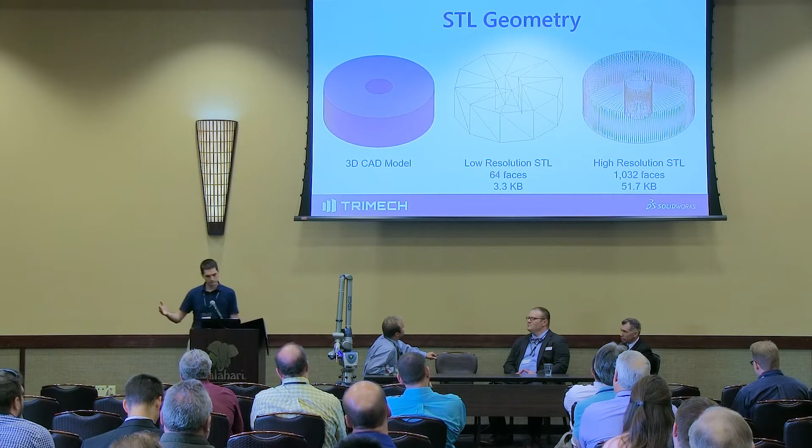If we look at some of the file properties, you have about 64 faces that make up that geometry, and it's about 3.3 kilobytes of data. Now at high resolution, you're increasing the number of facets, approximating all those curves with tiny facets, so to the naked eye you can't even tell they're there. But look at the effect on the number of faces—over 1,000 faces, over 50 kilobytes of data. For a small part like this, that's not a big deal. Where you want to be operating is over on the right-hand side of the page, so you cannot tell that your part's geometry is any different from your CAD model.

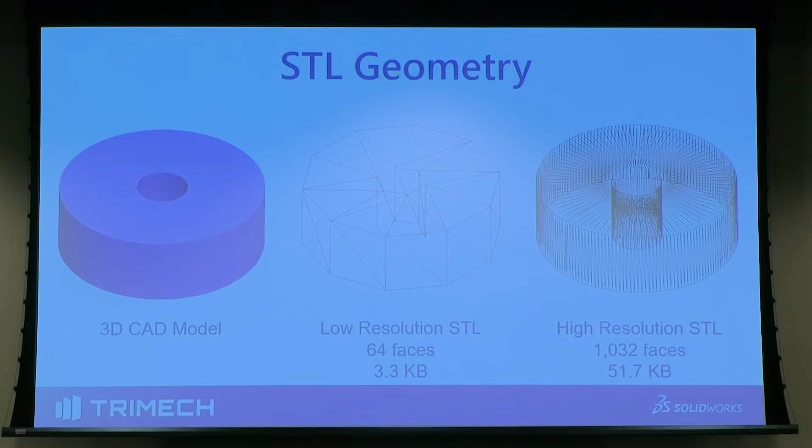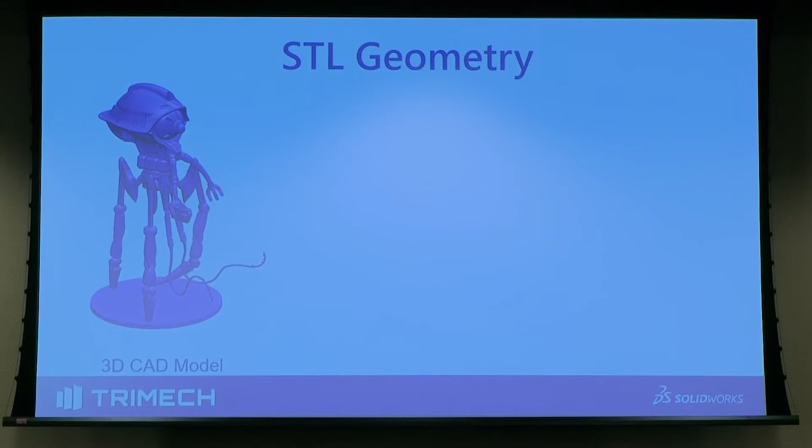Okay, what if we go to something very, very complicated? This is a model of a Martian tripod that we did. It's about 6 inches tall, made up of 18 different pieces, all laid out onto sprue frames and injection molded. It's a model kit you could buy for a game, like a fantasy game.

So if you look at very low resolution STL files, you're looking at about 180,000 faces here to make up those 18 parts, about 9 megabytes. Even at 9 megabytes, you're on that verge of, can I email this file to somebody if I needed to? That's something you have to consider. But that's at the very lowest resolutions.

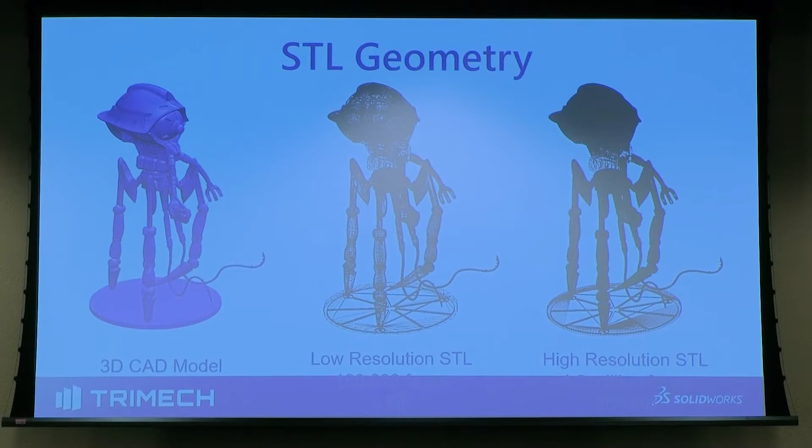Now we go to a higher resolution. Now you're at 4.2 million faces and 208 megabytes. There's no way you're emailing that. But you have to remember this is 18 different files. Again, you want to be operating over there on the right-hand side of the screen.

So let's go through some things that you need to do in order to save an STL file. First thing is you have some geometry, some CAD geometry.

We work a lot with plastics, so that's what I'm going to focus on here, and that's what we're 3D printing with. So if you have any hardware shown, be it threaded inserts, pins, bearings, whatever it might be, if those are shown in your part, before you save an STL, you want to hide those, because you only want to print the plastic part, not the metal part. You're going to install that later.

Same thing goes for construction surfaces. So if you're using surfaces to help with your CAD layout, whether you took that surface from a 3D scan or as construction geometry earlier on in your part, you want to make sure you hide those too.

Depending on the 3D printer and the software you're using to process these STL files, it might actually try to print that surface if it is showing. Now you don't need to delete these bodies, you just need to hide them so they're not visible. You can keep them there in your file, just hide them. All the CAD software will give you that option. You could show them again after you save the STL file.

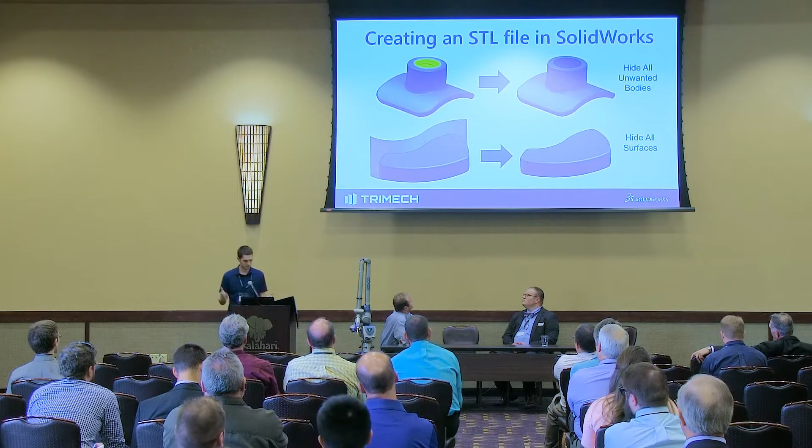And then from there, it's as simple as File, Save As STL. It's very, very simple to save an STL file. But the first time you save one, you need to set some parameters.

Can everyone still hear me okay?

Yeah, okay. So you go to File, Save As. The first thing you need to do is select the file type. Just like saving any other file format, you pick STL from the options.

The difference between binary and ASCII isn't really important here — just understand the binary file size is much smaller. It's kind of a standard to use.

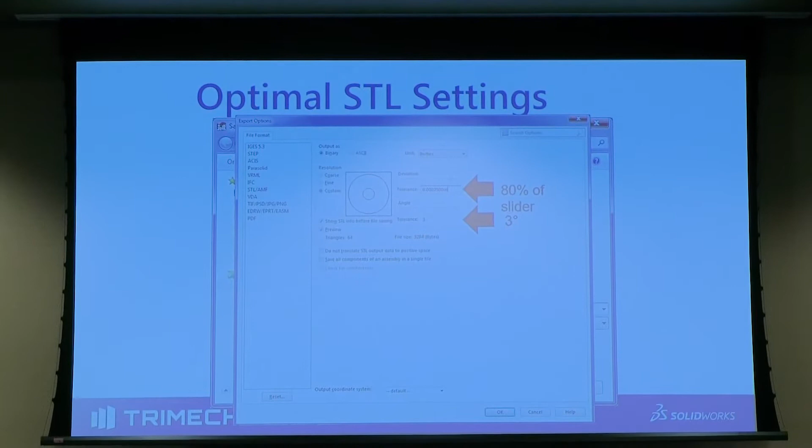And then you're going to set these two metrics. The first one is deviation, the second is angle. To my knowledge, the deviation is actually part-geometry dependent, so depending on how big your part is, that deviation will be different. What we do at Creative Mechanisms is set that at about 80% of that slider, and then we set the angle at 3 degrees.

A few years ago, each of the 3D printing machines would tell you where to set these. Now they just tell you to click Fine. If you look to the left of that circle, you have a few different resolution options: coarse, fine, and custom. Right now we're on custom because we're setting them ourselves. They say you can just use fine — if you click fine, those sliders will move over to the left and you'll have a lower resolution. We find using these custom settings to be the best.

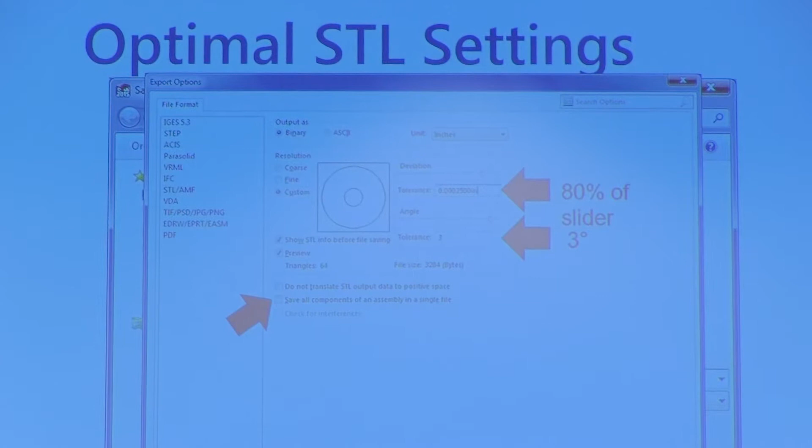The other thing you want to make sure you don't click is 'save all components of an assembly in a single file.' If we go back to that tripod I showed, that was 18 different parts in an assembly file. If I saved that as an STL, it would put all those bodies together as one STL. I want them as separate bodies so I can print, orient, and arrange them all on their own for reasons like optimal build direction and minimizing support material. You're also more closely mimicking an injection molded part, since you have all these different parts that need to be assembled, and you understand how they assemble.

And then you just click OK. Pretty simple — you only have to do that once. So you do that the first time you save an STL file, and that's it.

Another good tip is if you click Fine, write down the numbers, and then if you want to do custom... Yes, you can. I'm pretty sure those numbers will actually change depending on your part. As I was making this presentation, if I had the tripod up, those numbers would be different. The angle doesn't change, but that other number — what was that number? Sorry.

But that tolerance number does change. So like I said, what we found is 80%, 3 degrees seems to be the best. All right, let's go through this first walkthrough.

Again, we have this tripod model. It's 18 different parts, so we bring up the pointer here.

Okay, so we just go File, Save As. We select the STL file type.

In this case, I have 18 different parts, and I want to save them as separate STL files. So I'm just going to delete the file name and put a little hyphen there. Otherwise, that's going to be a prefix on every single file it saves. So I just put a little hyphen prefix.

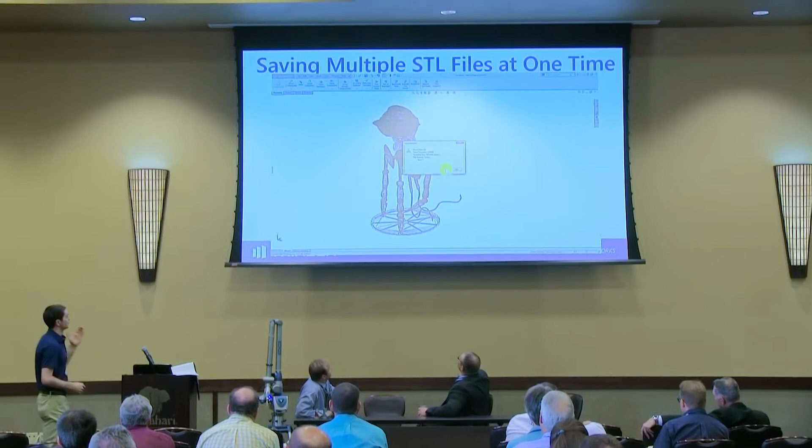It goes, it saves all 18 parts. I verify that it saved them. And then if we bring up Windows Explorer here, you see those files are populating, and now I have every single STL file saved.

Alternatively, I could go in and click on each one of those 18 different parts, open it, File Save As STL, and do this process 18 times. That's a big time waste. Just do it one time from here.

And now from there, we would take it into the 3D printing software. In the case of Stratasys, that's Insight and Control Center. So that'll be our next walkthrough. Anybody want to see that video again? No? Okay.

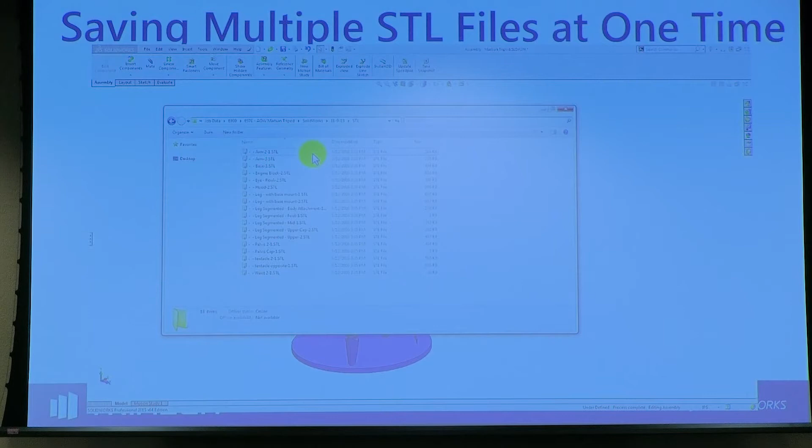Okay, so now here's a walkthrough completely from 3D CAD all the way up to 3D printing the part. So we'll run through that.

So again, you always start off with File, Save As STL. Choose where you want to save it. Confirm the save.

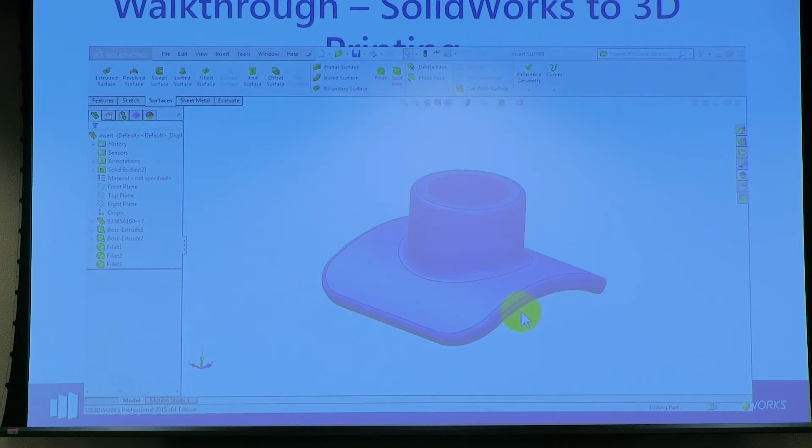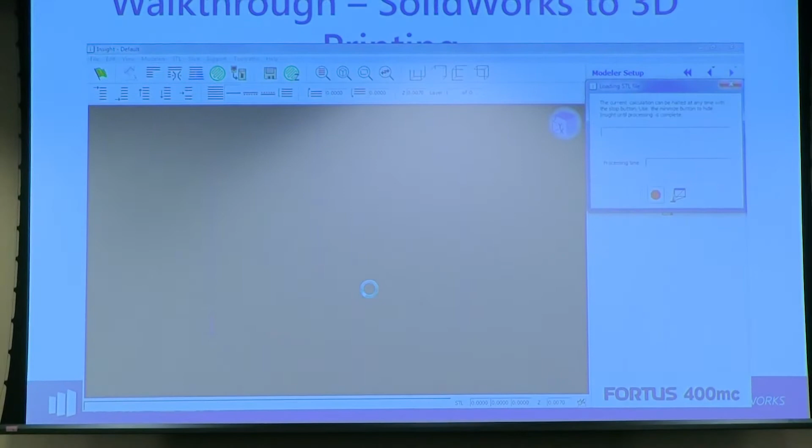Then you bring up the Insight software, this is from Stratasys. You're going to open that STL file, and the first thing you want to do is orient it in the preferred growing position. So we don't want to grow it like that. We're going to put it down on its side.

And then we click the Slice button, it slices it into different layers. We click the Support button, and it adds the supports beneath that.

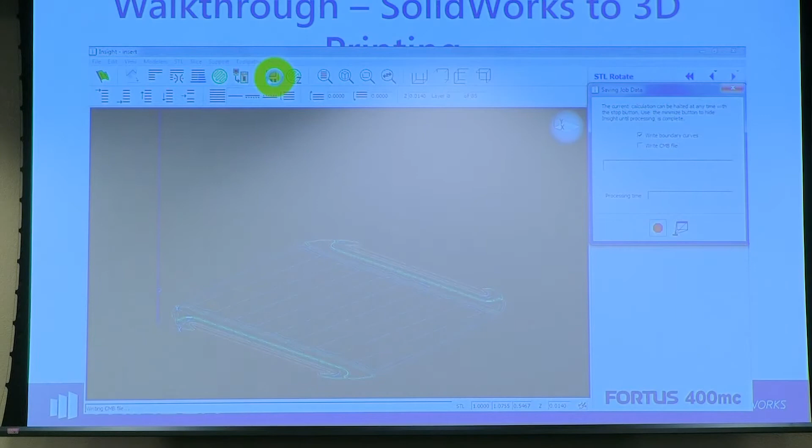And then you click the Toolpath button, it automatically generates the toolpaths. In this case, there's no reason to modify any of those toolpaths. It's a simple part, so we go to Save.

And then we go to the Control Center and insert that file. It's called a CMB file. There's our little part laying on our build platen.

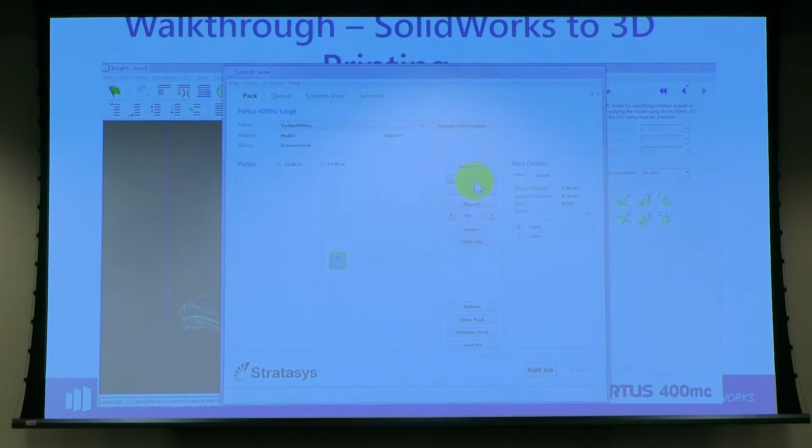We can add copies, you could fill up that whole platen, you could put other parts on there. If this were the case of that tripod, you'd have 18 different parts on here, and they would all fit. The nice thing about this is it tells you how much material you're going to use, how much support material you would use, and how long it's going to take to build.

And actually, once you click that Build Job button, all those numbers will fall to be a little bit lower. Anybody need to see that again? No? Okay.

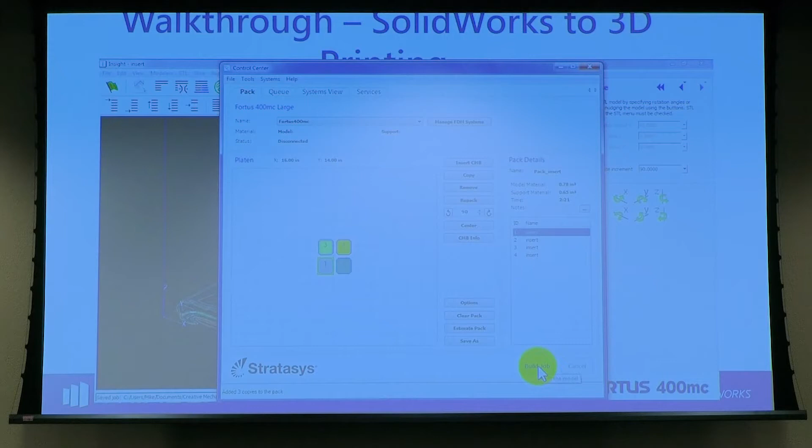So that's pretty much it for creating STL files and the background of STL files. There's all of my information.

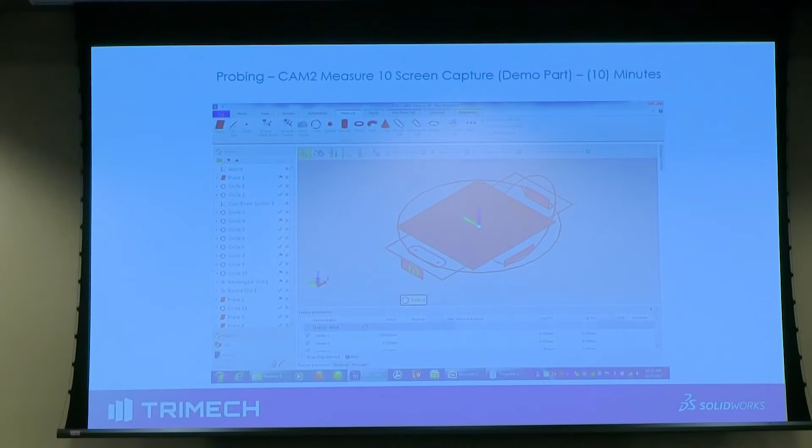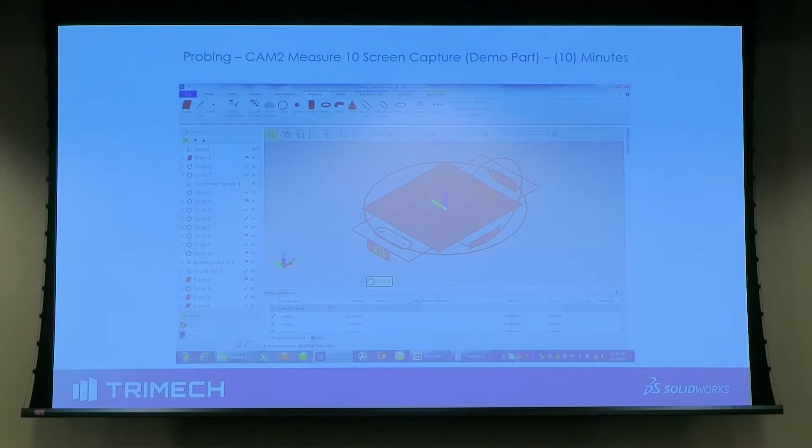We do a number of things we can talk about later, but here's the basics: these flat components might be all I need to capture a part that's mostly prismatic or machined, and then export that through to SolidWorks, for example, to create and model that 3D model. And then it can either be broken down, just like Michael said, to an STL that can be printed, or it can be put on a CNC machine, right?

So there's a number of things that can be done with that. This capturing of the geometry, essentially what you get is, if you looked at it... hang on, I think I'm losing my video feed here. The cord's kind of on a lift. You'd be touching off on these features and you'd have something that essentially looked like that on your screen.

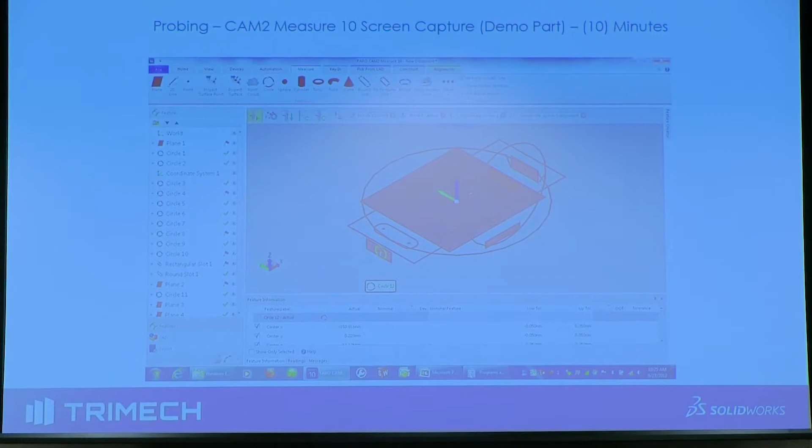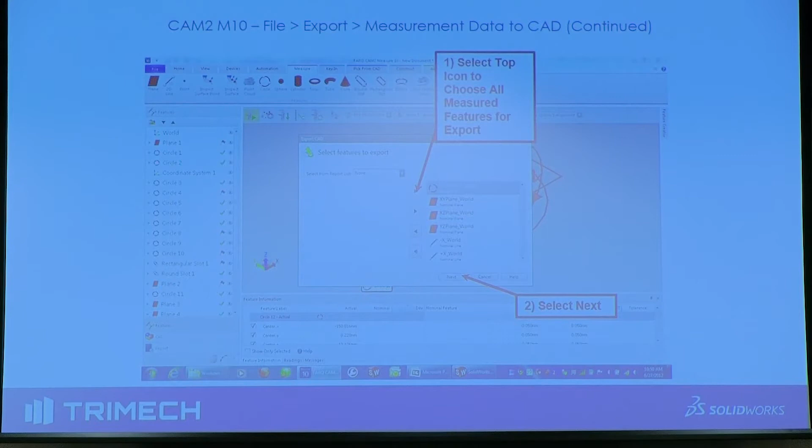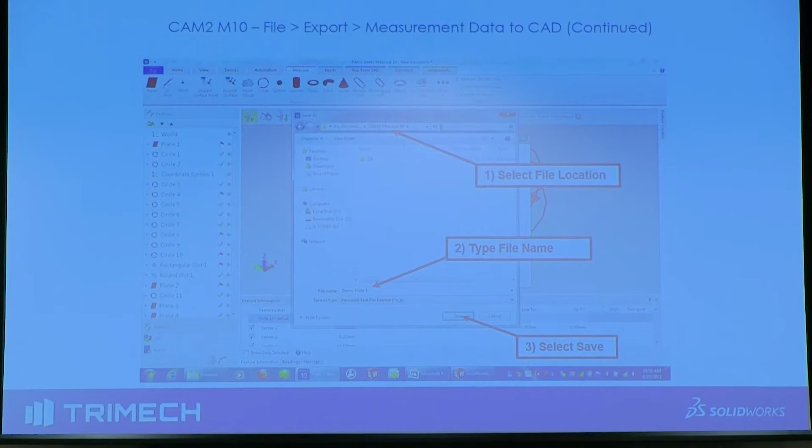So that's kind of where we come in first, is breaking down the geometry, and then we export the geometry out of whatever inspection or capture software we have, or right inside SolidWorks using one of the plug-in softwares. So you're sketching using the ARM, for example, and export it as a Parasolid file or as an IGES file, and pull that into, in this case, a Parasolid file, open in SolidWorks, choose a Parasolid format, a couple of settings, and this is what you've got.

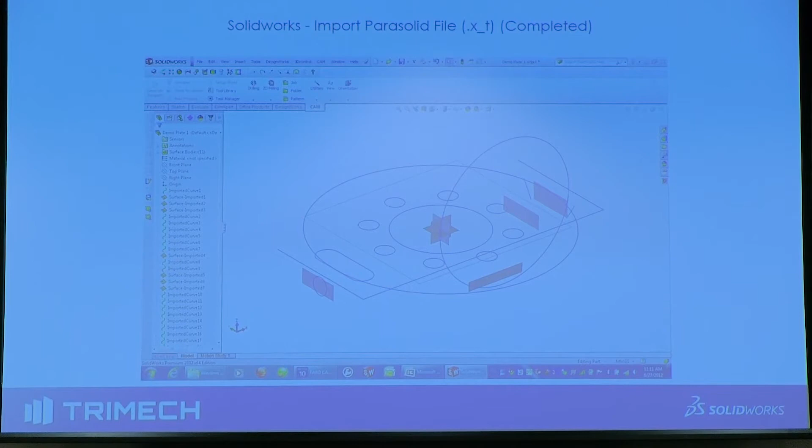That's enough for a designer to knit together surfaces and punch through holes, and that might be all that someone needs. Very simple, it's not very expensive. The ARMs have been around for 35 years. Gantry CMMs have been hand tools, and keying in that information has been around for a while.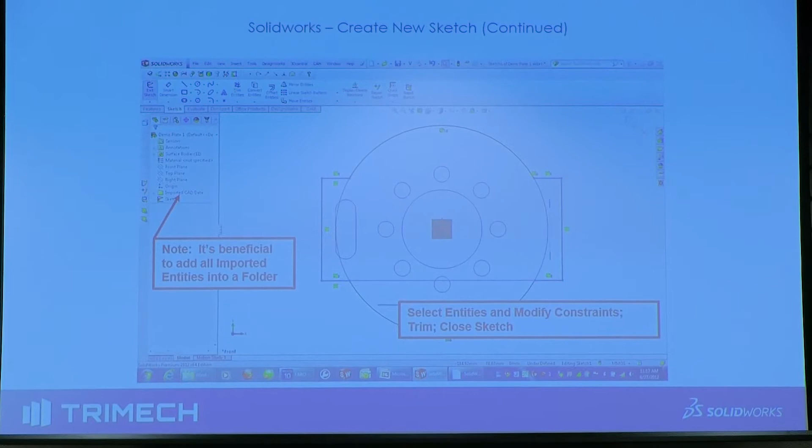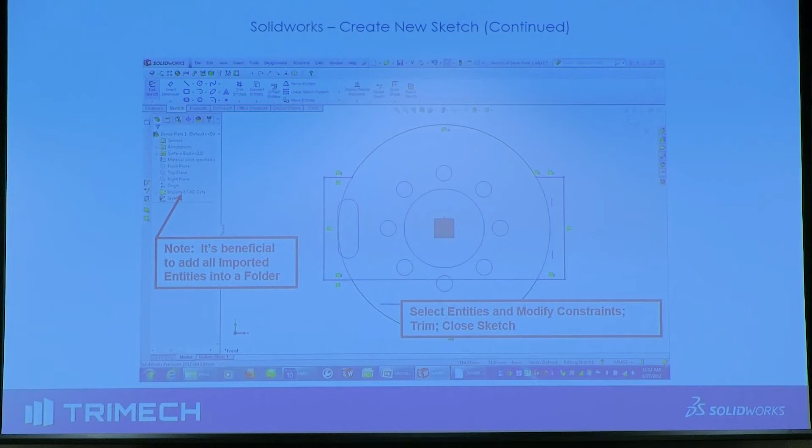But to a certain degree, we can take and look at something in reality and pull it into the digital world faster than keying those things in, faster than just clicking them and saying, hey, I need a thickness to be an inch. This actually pulls it in as built. So there's your clear geometry back for a second, and your coordinate system in the middle of the part. And you extrude it and you have a solid model, okay?

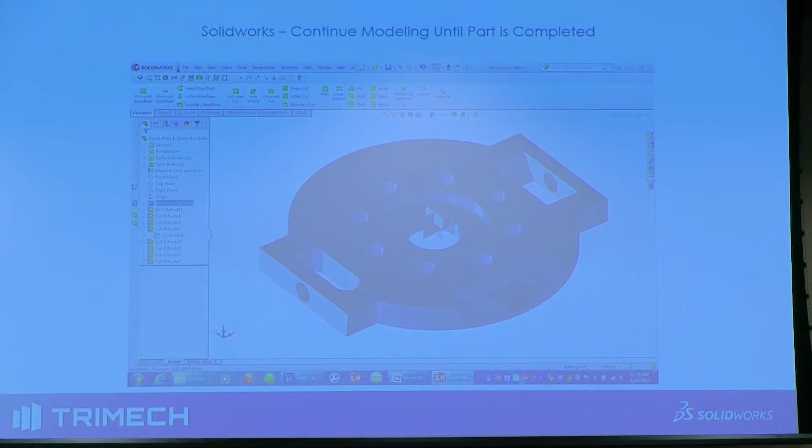So this may be, if some of you are thinking, hey, we got to get into 3D scan and we got to make 3D parts, turning them into STLs, we can skip this third-party point cloud idea completely if your parts can be broken down to a more simple level. So that's one interesting thing, is that you go directly into the SolidWorks software or Inventor software, and then export that either as an STL or as an IGES file or as a format that your 3D printing software or CNC software can cut.

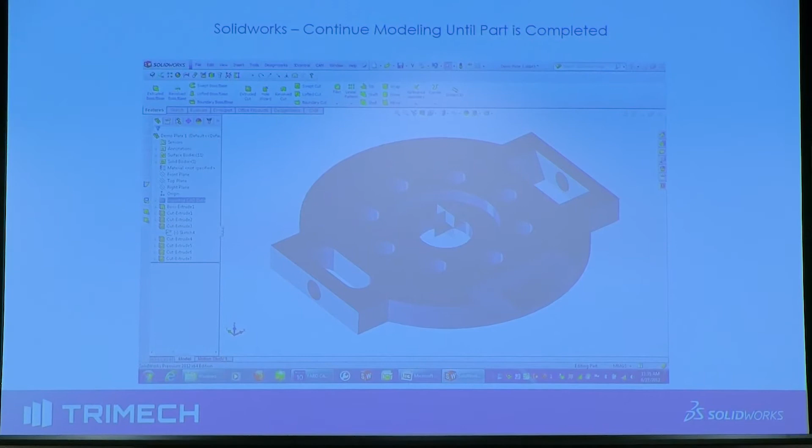Where it gets really interesting is when that geometry gets more complicated. So what's a portable CMM? It's a relatively old piece of technology that's got a lot of development in it. It tracks where that probe is, and it also tracks where the laser scanner on the end of it is in space. What's 3D scanning and how does it work?

We'll get there. And then the Faro arm, which we can talk about offline, but it's one of many devices out there on the market that can capture data as far as laser scanning is concerned, and it's one of few that can capture both that hard data at a tight level of precision and the scanner data as well.

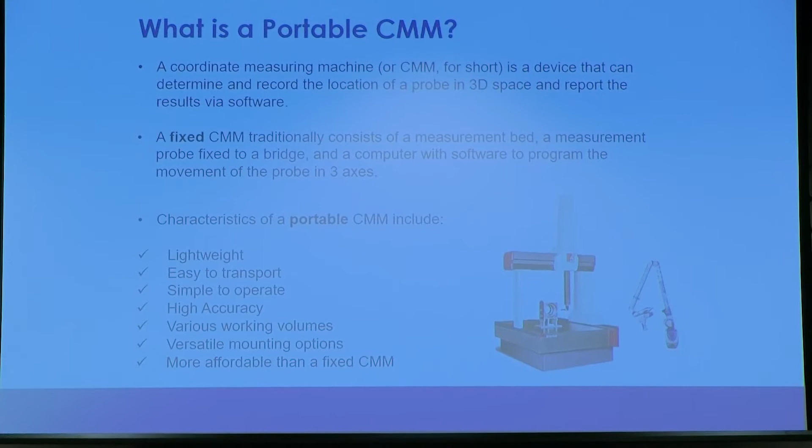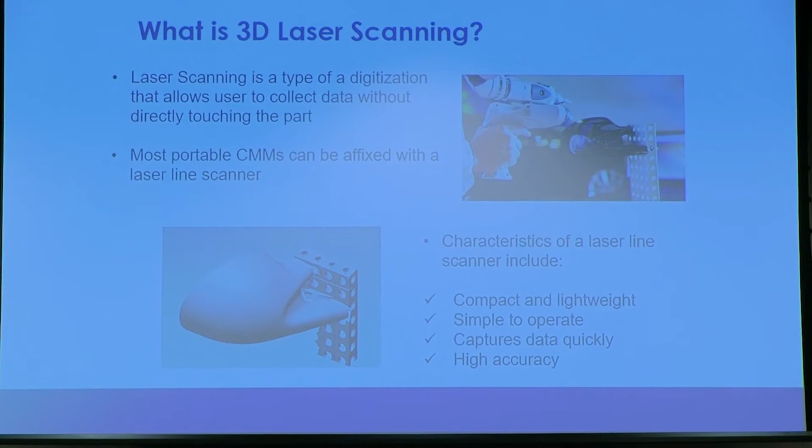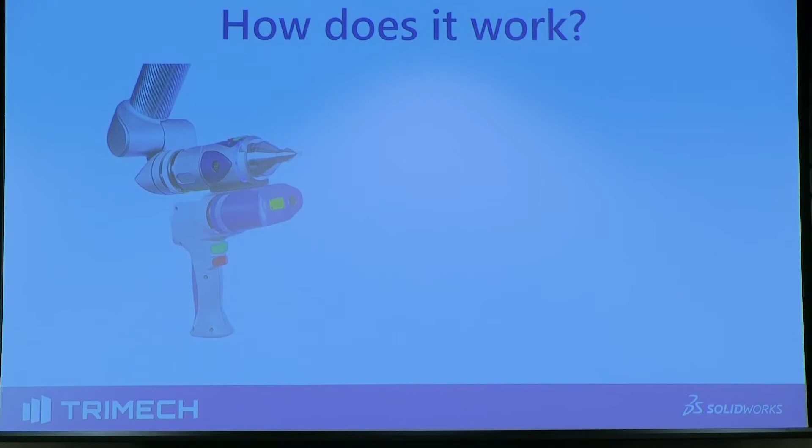Faro sent me this great file of things I should talk about, and we could really highlight the types of things that we do. But laser scanning has had its obstacles in the past as far as being able to digitize and capture geometry. On an arm, you get to work your way around a part, so the line of sight isn't the biggest obstacle. But what has been is the material type.

So let's say we have a really dark part. We have a stealth part like that F-22 Raptor. We've got some pieces on there that were dark. We would have had to spray paint those or add something to them in order to be able to scan that in the past, right?

If you've ever gotten parts back from somebody, has anybody used a 3D scanning service? If you've ever gotten parts back like that and they're kind of white powdery on the edges, they sprayed it with a fairly toxic stuff called Magnaflux Developer Spot Check. It's not good for you, and you don't even want to read the sheets on it. But the idea is you're trying to dull that surface, trying to make it more light colored, so that the light you're emitting to measure something doesn't get absorbed. So dark materials were tough.

Reflective materials wreaked havoc on what we were trying to do. Imagine shining a light on something that's a mirror polished chrome boat propeller, the first thing I scanned with this. And the light goes off in the room and the cat's chasing it across the couch.

I say that because my wife and I both worked for Faro, and our cats go nuts every time they see us break out the Faro arm.

My 2-year-old really likes it too.

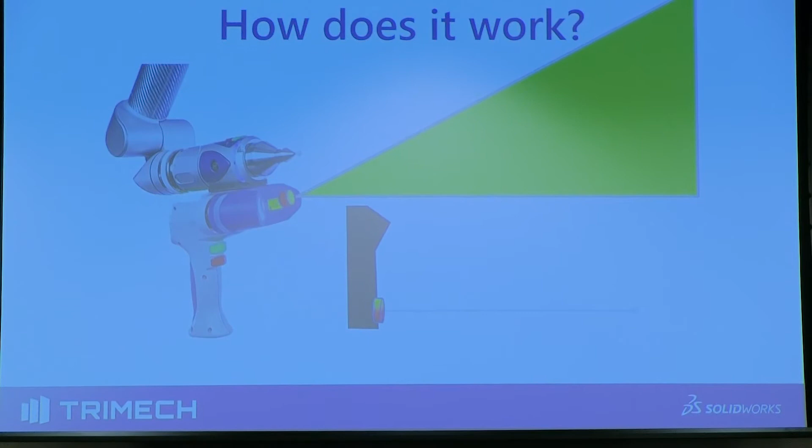Long story short, reflection really wreaked havoc on the types of things we could scan without having to coat them. When we get into medical products, pharmaceutical companies, trying to reverse engineer an impeller to pump purified water through a vat at Merck, I've got to think really hard about how I'm going to scan or collect that data so we don't add anything to it.

So we don't contaminate a part. Here, the arm essentially emits a laser, triangulating that laser and what surface it's on with the camera. I just want to skip through because I think I'm running out of time.

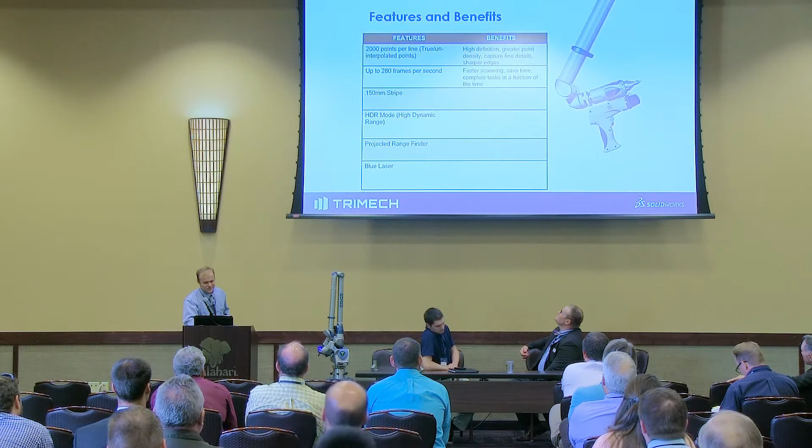We laser scan, our scanner's fast, it captures data. The resolution of it is extraordinarily high. You can see every stitch in a piece of material, in a car seat, in an aircraft seat. You can see the height and measure the height of the ink on a foil stamped label.

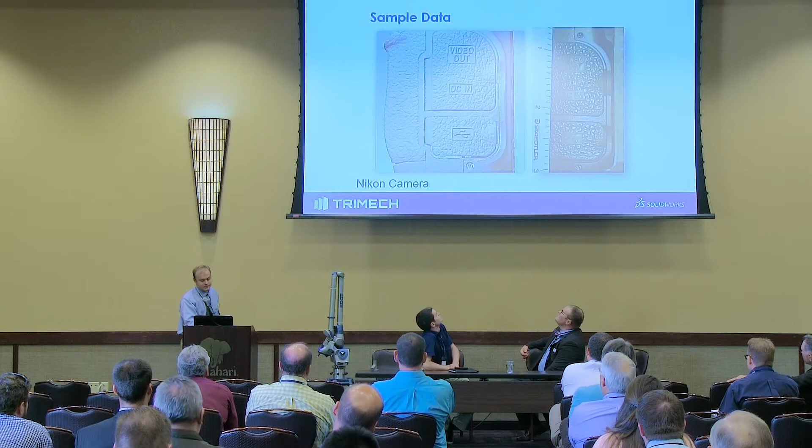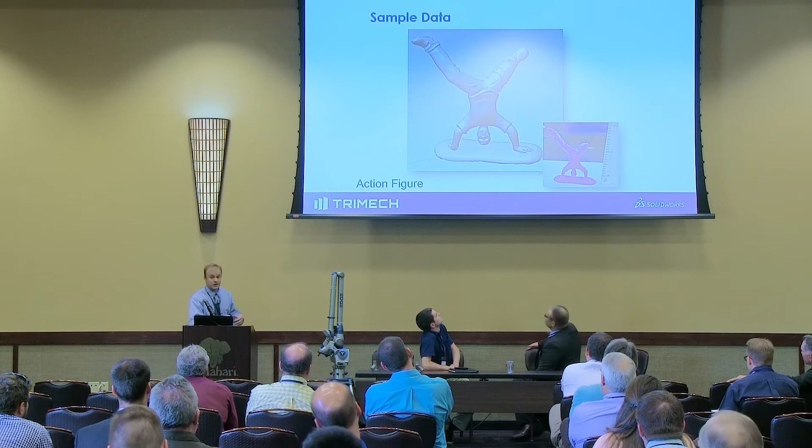We can see the surface texture on the Nikon camera there, a Nikon camera. That's a 1-inch tall statue, and when you scan that you probably have, when we're talking about file size, 4 million or 5 million points that translate into a relatively large file size.

But what we're looking at with this point cloud is a bunch of individual points, and they all have an X, Y, and Z value and a vector by which they were returned to the camera.

The way we create an STL file, or our software creates an STL file, is basically a one-click process. You get an STL, and depending on how many points you have, it's going to connect the dots, if you will, between nearby points to each other.

Instead of defining a surface on a bunch of little points and where they kind of sit, where you could wrap a surface across, it's like scales. It's tiny little tessellated facets that define the surface.

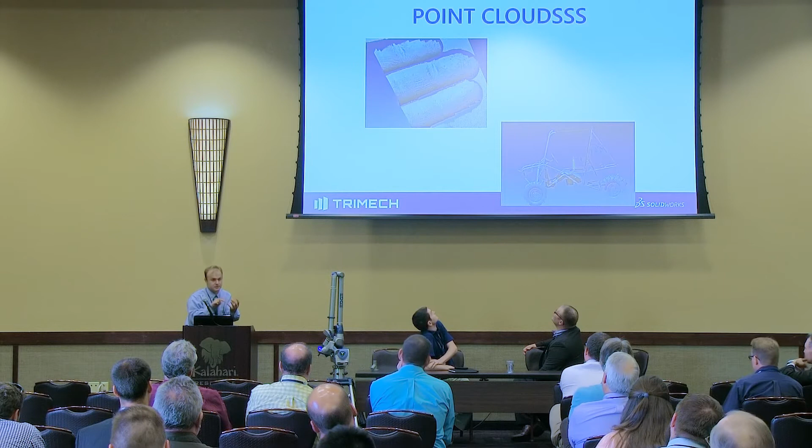Where I laser scan somebody's fingerprints, you can see the gaps between their fingerprints, and I'd have to have a really tight mesh, right? Really tight STL in order to see that resolution.

Because we had 40 million data points on it, we hit a button that looks like a filter, and it decimated the model. So instead of 40 million points, I allowed it to keep 10% of that.

There's a little slider in the software that allows you to choose whether you want an equal triangular mesh STL, or one that maintains higher density and smaller triangles at the edges or areas of greatest curvature. So you get tighter, more dense data in areas where that changes a lot, and more sparsely populated mesh in areas where it doesn't. It doesn't have much effect on your geometry, but you can keep your file size a little smaller.

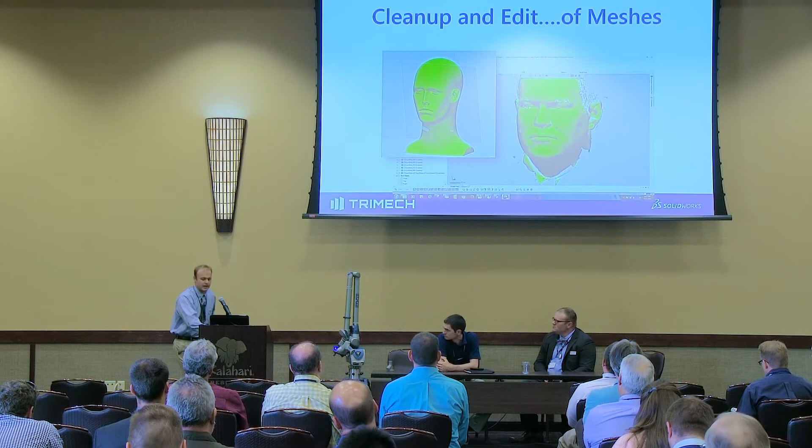All we did here on cleanup of the scan of Chris's face was actually just trim some of the boundaries and throw away 90% of the data and say, I want to make a mesh of that.

There were also a couple of little holes where eyelashes and eyebrows got in the way, and at this point, at least in the software, it's a matter of clicking on that hole, or saying every hole larger than whatever distance, and there's a slider for that too, and it patches it. It looks at the geometry around it, and it either patches it flat or with a bit of curvature to match what's around it, and it's up to you.

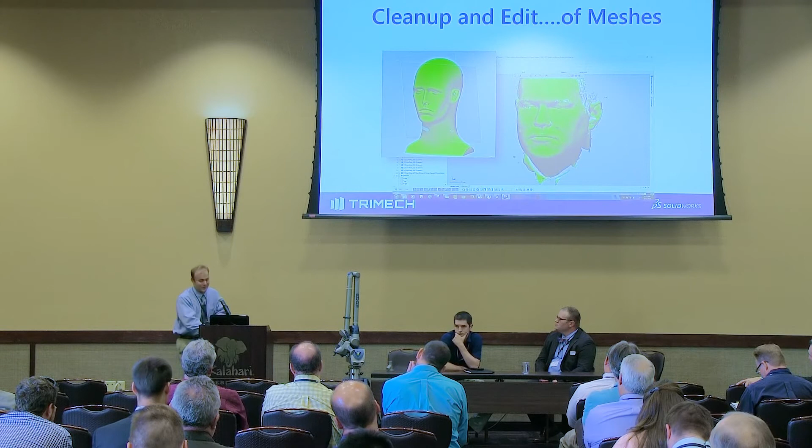So there's a lot of little check boxes for that within these softwares, but essentially we can superimpose these two things. I thickened that STL and made it printable. We could easily have printed a mold or a mask from that.

The scan we took there was about 10 seconds worth of scanning with the arm. He just stayed really still. I think we propped his head up against the wall behind and did a couple of spray paint passes across it, which was pretty interesting.

Now, those are STLs. We're in traditional design and manufacturing of things.

The old question would have been, what can I do with that point cloud? Can I bring that point cloud into SolidWorks? And the answer is no. It's so big, there's so many points in there that SolidWorks doesn't know what to do with it or can't compute that much.

Now it's, what can I do with that STL? Well, you can do a lot with an STL. You can print it. If you optimize it, you can print it efficiently. You can scale it, thicken it, push and pull it. They even have a sculpting tool that gives you force feedback, so you can sculpt into it like a sculptor. There's software that allows you to do that. You can do geometry for jewelry with it.

What I did here was I made a mesh, and then I said, what I'd really like to have is an as-built document, but a solid model, a solid IGES file that we could then sketch on top of or build from within a SolidWorks program.

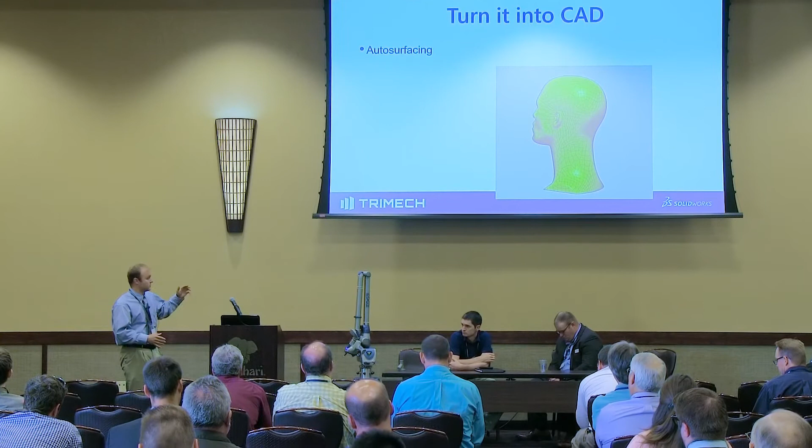It was not quite a one-button click, but pretty similar, where I said I'd like to auto-surface this. The software reads the curvature change and develops 4- and 5-sided patches that basically define that surface. It wraps over top of all those tessellated triangles to a certain degree of accuracy, a patch, and then connects these patches so you have another mesh framework.

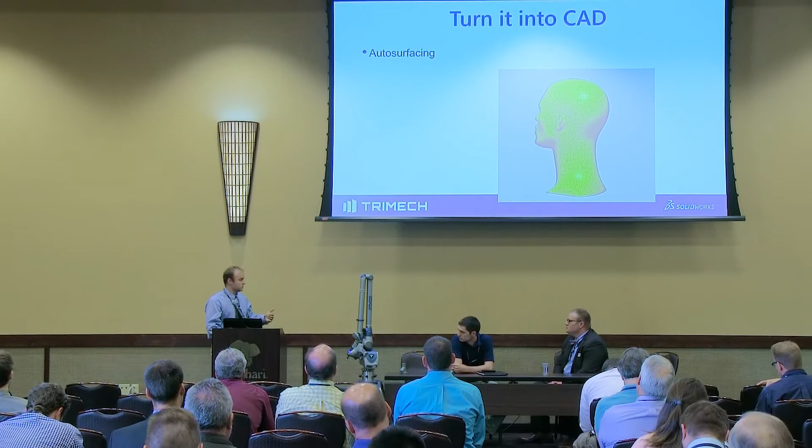And it's a small enough mesh that you can bring it into SolidWorks as an IGES file. It's a relatively small file. Then you trim it on the bottom, and you wind up with a solid model.

Now this model can be machined. Some CAM softwares can handle an STL for machining, a CNC tool path from an STL. Some softwares can't do that. And some modeling softwares can't then build on a framework.

So if I was going to build a helmet, like my Gentex folks over there, from this, I would want to go, this anthropomorphic head is the ideal or golden size, or the large or small size of what we're trying to produce here. Or this is a custom helmet for a specific pilot or operator, and we're going to make this perfectly fit them and link in with their communications. There are options there, you can do any of those things now.

But the idea is you have to get into a format that you can use it. When it comes down to a cast part, this wasn't the best example for me to bring, it's just the only one I had that wasn't terribly proprietary. There's not a lot of draft on this. This was an investment cast piece. There are some fillets that are fairly complex.

But the idea is, if I scan this, I would want to then pull geometry. If this was a legacy part and I was trying to make a finished CAD model, or a parametric CAD model, which is one where you're not just scanning and taking for gospel that the thing you've scanned is exactly what you want to produce and replicate.

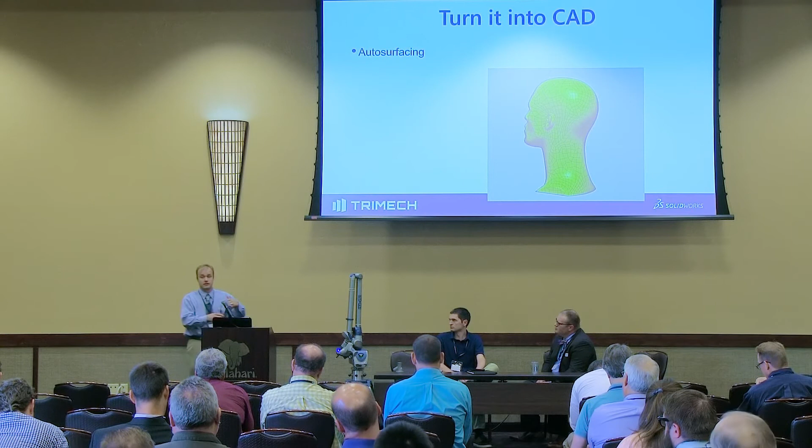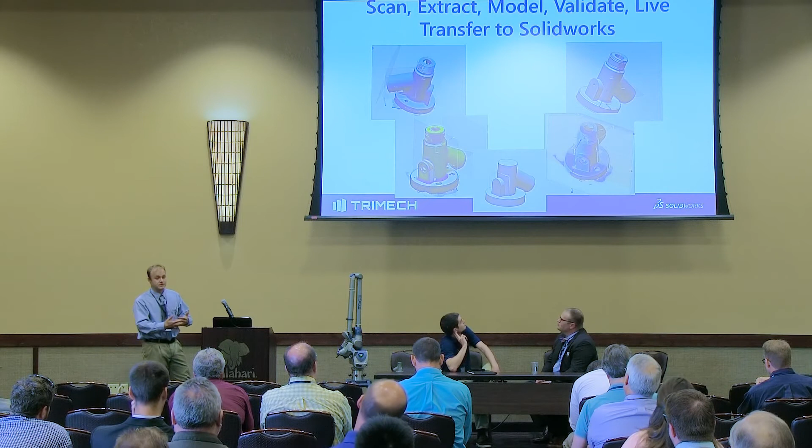You want to go, I need that scaled, I need that larger, I need that smaller, I need that sketch that we create this with to then be scalable, editable, able to be optimized using some of the software tools that we have available to us.

I want to do flow analysis software. I don't want to investment cast that, I want to print it. I don't want to investment cast that, I want to sand cast it. I need 10,000 more than we can handle with the investment cast process right now. There may be a lot of factors that cause you to go, I don't want to make that out of steel, I want to make that out of aluminum, for whatever reason.

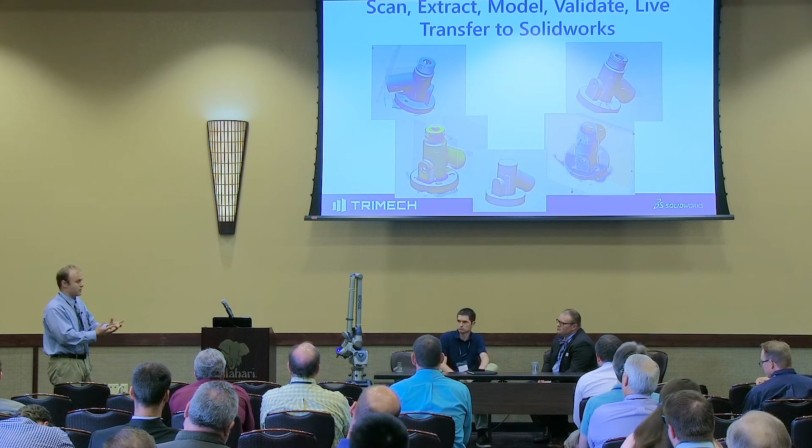Excuse me, guys, I'm suffering with some allergies here.

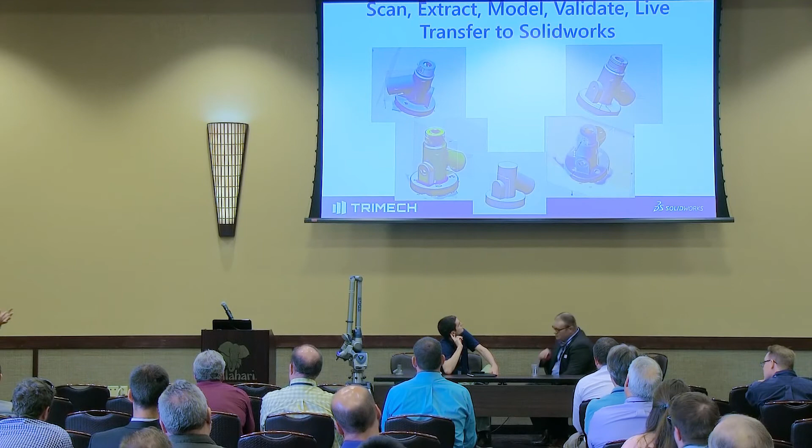Laser scan looks like that. That was like a 5-second laser scan right there on the top left. But what you get is a capture of the surface. I'm reflecting that blue laser line off the surface, taking 500,000 points a second to capture that. And what I get from it is accurate to plus or minus 0.002 of an inch, a collection of data. That's a point cloud.

Sorry, go ahead, 5 minutes. Okay, I thought you were telling me to stop. Good, I got 5, I'm almost done.

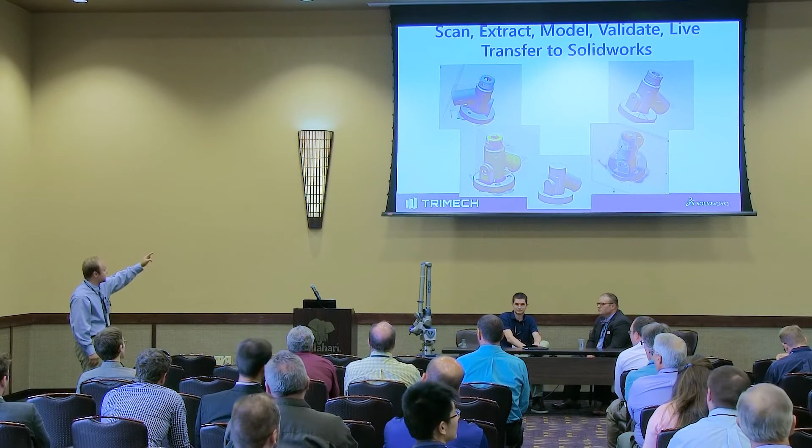The next step with this would be, if I wanted to just print that as is, as cast, as found, I would have taken another 10 or 20 seconds to scan that from almost every angle, and I might even have used the probe on the arm to reach down inside the bore and measure its physical diameter and depth and counterbore from both the valve body entrance and the main bore.

And then I would smooth that, decimate it with the filter tool, keeping the areas of highest curvature more dense than others. So I take that from a 10 million point scan to a 2 million triangle mesh, and we send that to Chris, who puts it into the Stratasys printer's Insight software, and we go to it.

Now, if what I want to do was give it to the engineering consultancy or my in-house engineers, say we've got this legacy part, we have access to it, we have the IP for it, we're not trying to rip somebody's product off or make counterfeits. Maybe we're analyzing some competitive products, because that does get done. But we're taking this part and want to use this basic geometry because we've got a supply chain in place to make these types of parts quickly. We just need it longer, wider, bigger throat, polished inside, whatever it might be.

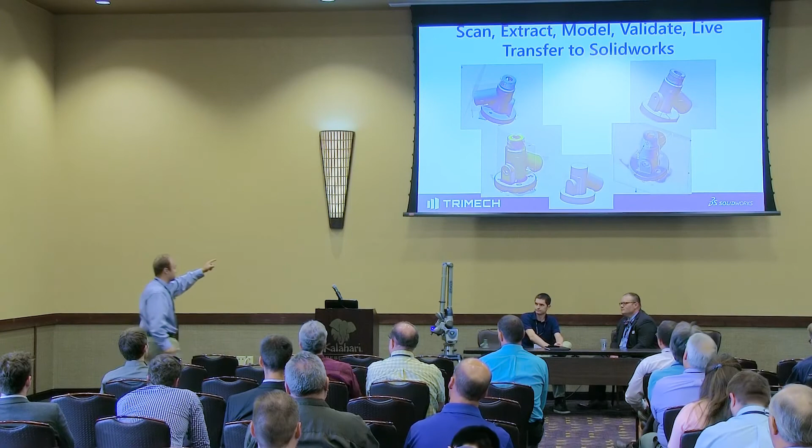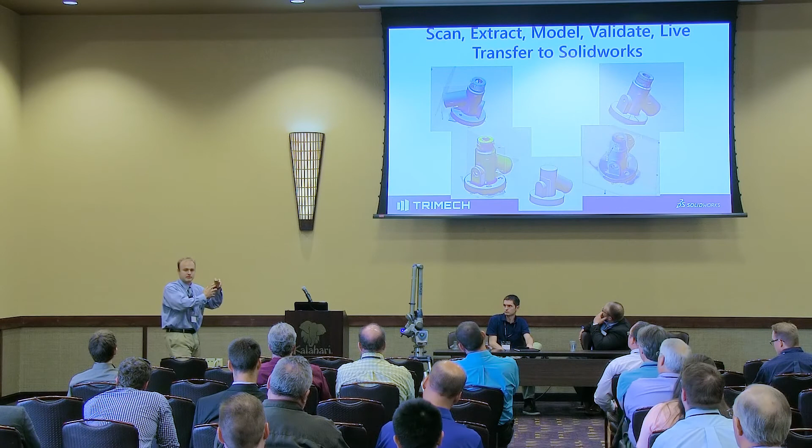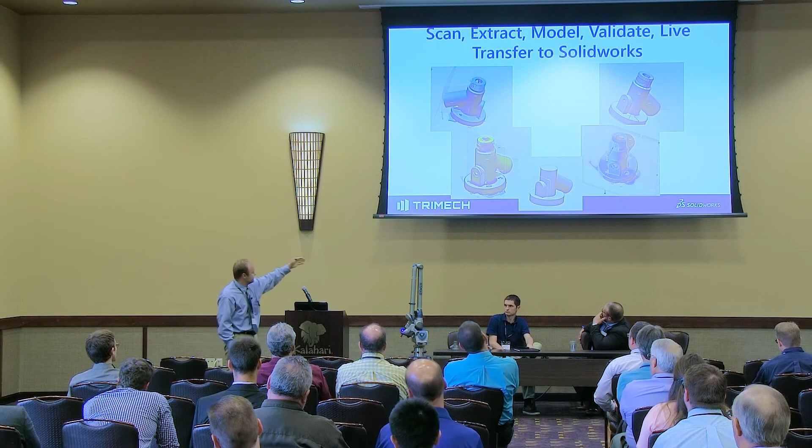Here's where we take that mesh to the next step at the engineering level. We break the mesh automatically into different colors, marking where the curvature starts to change. It picks out specific features because I want those data points, and using metrology practices, I want to best-fit or min-max fit geometry to them. So that top surface, that's a plane. That bottom surface, that's a plane. This front surface, that's a plane, just like we broke down our prismatic part probing it. And that little piece there is kind of an extrusion off that part.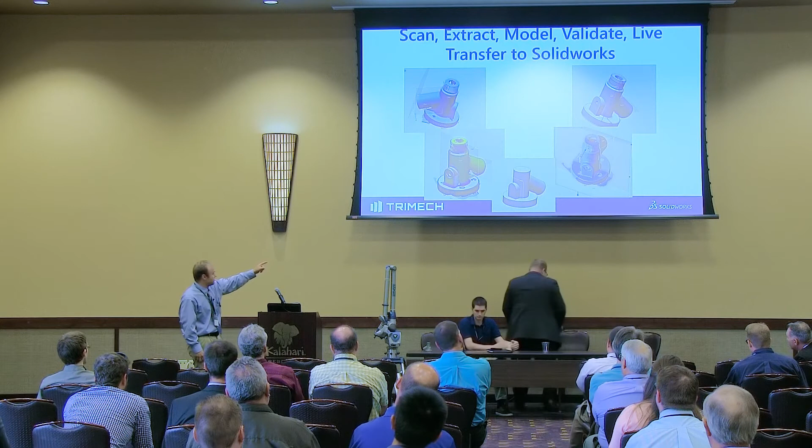So what we actually did was pull, like this blue one on the bottom right, a sketch plane through the part based on the front plane of that little extruded house-shaped piece. We took that profile and extruded it in - this is all within the Geomagic software. The next step was the fillets, how they sit, and the tapers - some were helical, some were spherical. I actually cut a profile and created a sketch.

Now, where this gets interesting is that sketch has a model tree, it's got history, so that sketch is constrained and editable. When we're done, to the point where we've got that gray top right part showing, we've got a part based on accurate scan data - with a couple of extrusions, base geometry, and a revolution based on a sketch. That can then be live transferred out to your SolidWorks program. SolidWorks opens up in the background as a second window, and the feature tree and history tree start feeding in, including that sketch, right into SolidWorks so it builds in fast forward before your eyes.

In some cases, and I've talked to people who do this, you've got to slow down a couple of steps, like trimming with freeform surfaces one at a time instead of ten at a time. But what you get is a part that your engineering consultancy can take and edit and run through flow analysis software or an FEA practice, then make a change to that sketch without having to completely rebuild the part. So this is where kind of the magic really happens, but you still need that intellectual capability and engineering understanding of your form, fit, and function. It's not just an automatic copy machine.